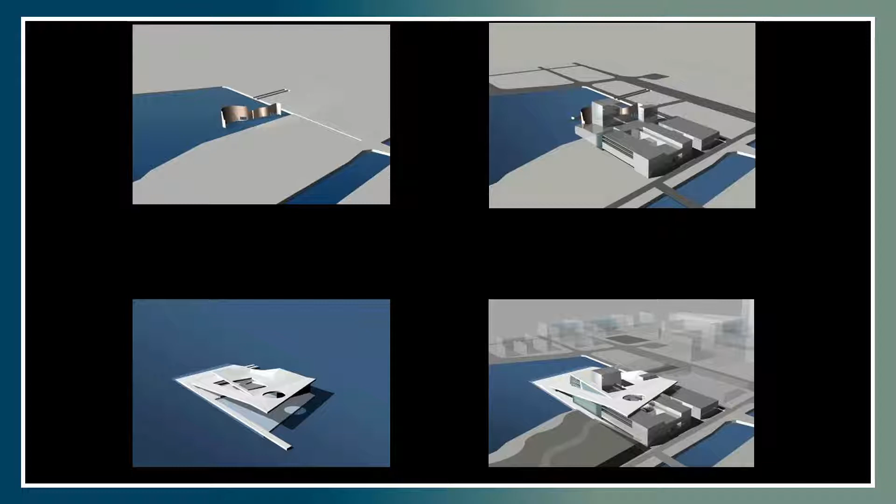If you look at these four diagrams describing the four main elements of the Opera House, or three main elements that then become the Opera House, you will see that at the upper left picture, there is a curved wall. And this curved wall is sitting exactly along the coastline between land and water.

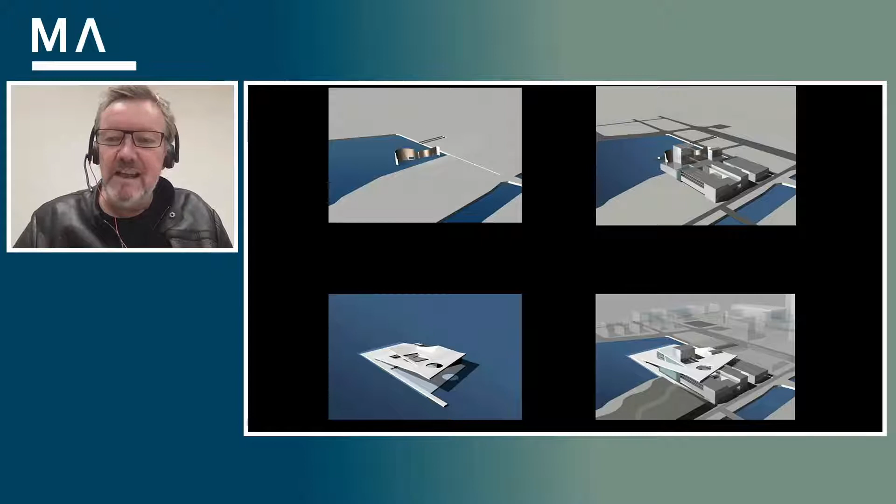And that is also the division between Oslo and the world. And this wall represents the definition of a threshold between the public and the performers in this threshold situation.

So you could say the performers are living in Oslo and working in Oslo. So they walk to the right of this curtain to work, to perform for people who are coming from outside and meeting this wall before they go into the performance. So the factory that you see to the right, upper right, is in fact a workspace inside the opera where people go to work from Oslo every day. And that is located on the land side of Oslo.

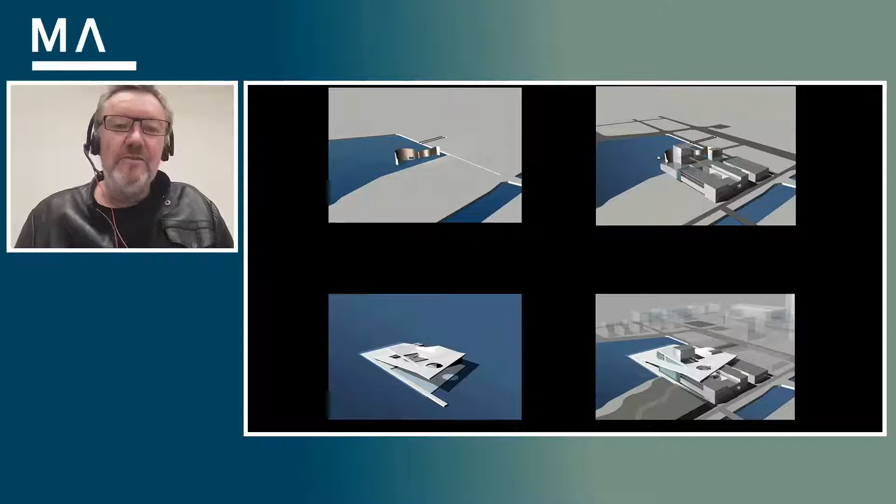But to the left of that, you have the public areas, the lobbies, and they are over the water. So in that particular location, you have a transition from over the water, through the wall, and onto the land side of Oslo. And that's how the sequence of thresholds were established.

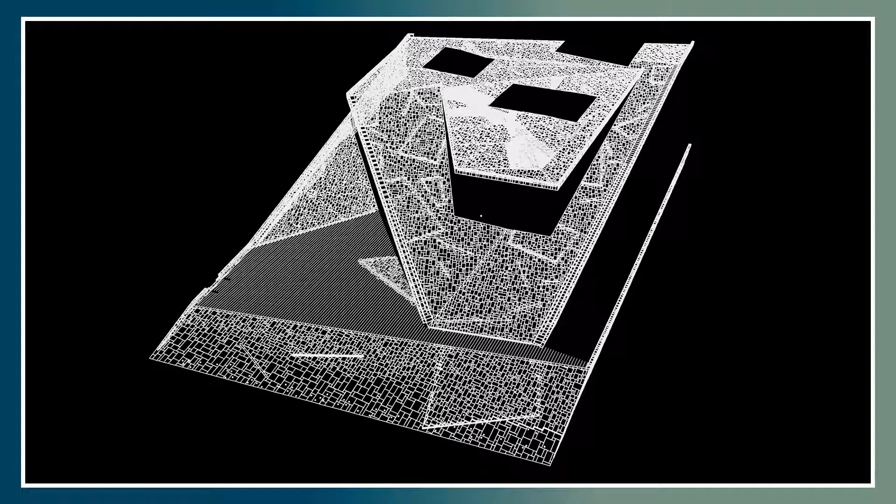And then, of course, we covered the whole thing with a carpet, a roof. And that gave us the possibility of interacting with the larger public with another type of threshold that physically was represented by the building.

A sloping roof that was climbing out of the fjord, out of the water, giving us the possibility to have an intersection between the horizontal waterline and the slow climb up this roof towards the top of the building on top of the opera.

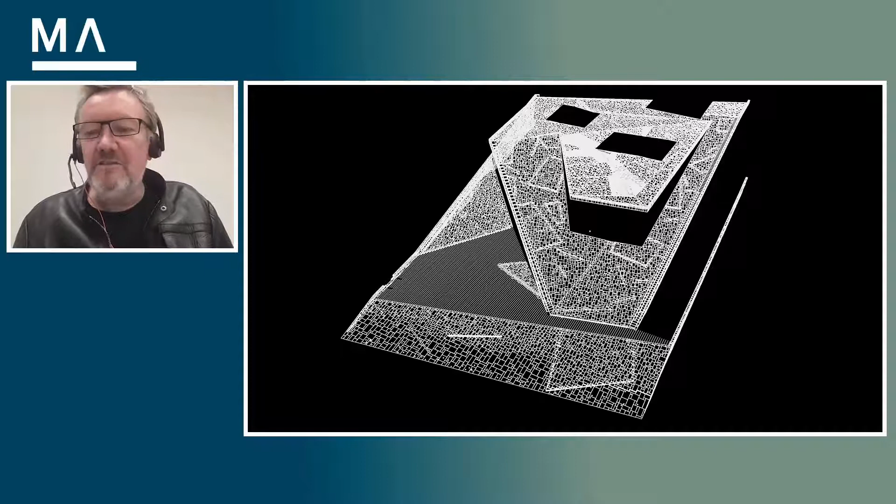That has given us the understanding that architecture might be seen as the art of prepositions. Inside, outside, over, under, between, in front of, behind are all locations of the body. Every threshold you move through is measured against the location of your body in relationship to something else. This roof symbolizes a way of looking at something you can walk on instead of something you walk into. All of a sudden, we had a preposition related to opera houses which said you can walk on the opera, not only in the opera.

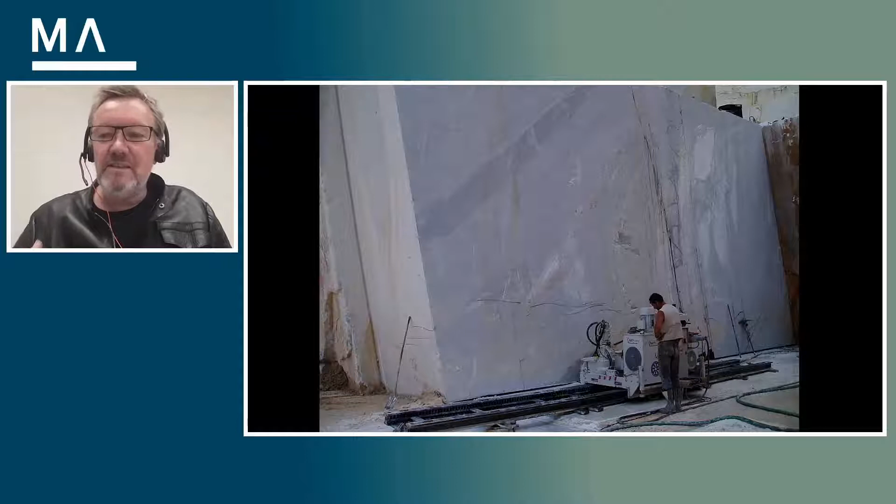So this roof then became an instrument for us to negotiate between the sky and the waterline itself. To find this solution, we had to dive deep into the mountains of Carrara in Italy. We had to find a quarry that would actually represent this whiteness and start treating this surface as a negotiator, as a Sunday shirt, but at the same time as something that connected the water with the sky.

We had to start testing the surfaces of this marble and move away from the perception of marble being something polished, like a bathroom situation. So the bush hammering surfaces of marble turned out to be wonderful when it comes to catching light, and all of a sudden they became a threshold between light and shadow.

We tested these things in one-to-one elements, large scale, with Campolonghi in Italy, and you will even see that these stones you see here are made out of one piece. There is no joint between the lower portion of the upstep and the upper portion of the upstep of this stone. It is one compact element of stone. That means there is no transition between horizontal and vertical when it comes to the solidity and massivity of the material itself. It's all made out of one element.

So the opera per se actually started moving us in a direction of understanding what we wanted to achieve when it comes to thresholding from inside to outside, from above to below, not only through human movement, but also through the movement of regular understanding of accessibility in a city.

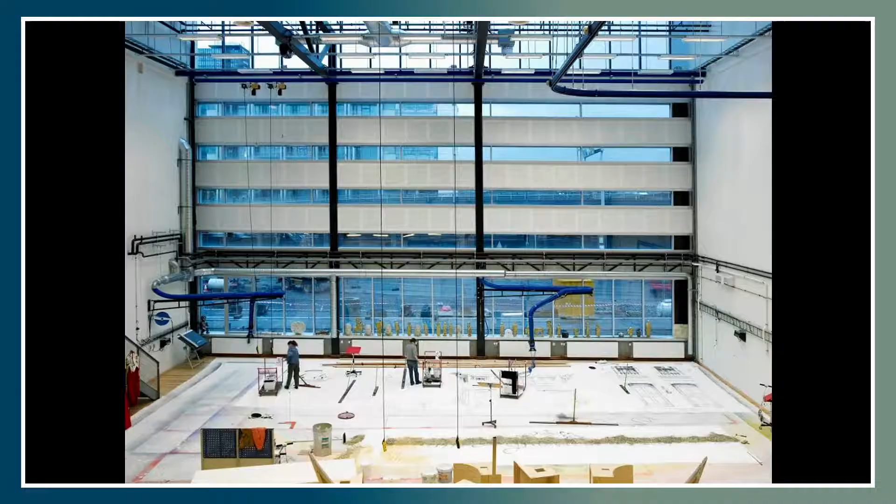That, of course, also counts for the back of house functions and the workshops. Like I said at the beginning, the factory located in Oslo provides a normal everyday situation for all the 800 people working in the opera house, and to provide a nice workspace for them that are actually creating the stage sets is another threshold, not unsimilar to the kind of setup and split of day that we have in our own office when we do architecture.

So to summarize, these kinds of things are things that you think of, and we've been writing about these things also during the competition.

These were themes we were thinking of when the building becomes the translator of all these things you're thinking. The question is, of course, do you actually connect the building with these things when you're there, or do you not? We don't really care. You might as well just sit on the roof and remember you forgot to buy milk for your home, and that's the only thought you had. So you don't have to deep dive into associative thinking in order to transfer yourself into a borderline situation.

Another project, published quite a bit lately but much smaller and of a different kind, is a small restaurant called Under. We were given the task by two brothers on the southwest coast of Norway to design an underwater restaurant. You can imagine at the beginning of such a job the sort of Caribbean feeling you might want—clear glass everywhere, sitting in a bubble underwater. But that wasn't part of our interest. We were not interested in that kind of transition from above to below; we wanted a much harder, more direct relationship between an object and the water.

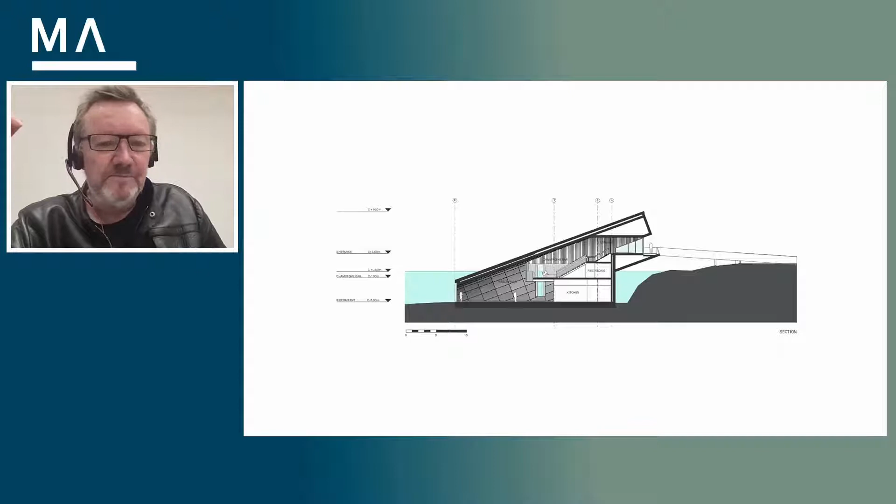The section of the building is simple. You don't really see everything above water and how it's actually constructed, but it was precast on a floating deck, then transported floating to the site, lifted off the deck, carefully sunk into the water, and filled with water so it would sink all the way down to the foundation points, where it would be fixed. Then, after pumping the water out, you had underwater space.

When you walk over this tiny bridge to enter the building, it's almost like the building has already left land and is more like a vessel than a building. But once you come inside, it's clearly a building—you meet a normal bench. It's not marine; it's an interior space clad with wood like any other building.

As the interior space opens up, you understand there's something different awaiting you at the bottom. The light coming through the big window at the end, six meters underwater, becomes your great attractor. On the way down, you can measure how deep you are by another vertical window showing the borderline between air and water in the middle. So you have a reference system as you move further down toward the bottom of the restaurant, where you sit and are served.

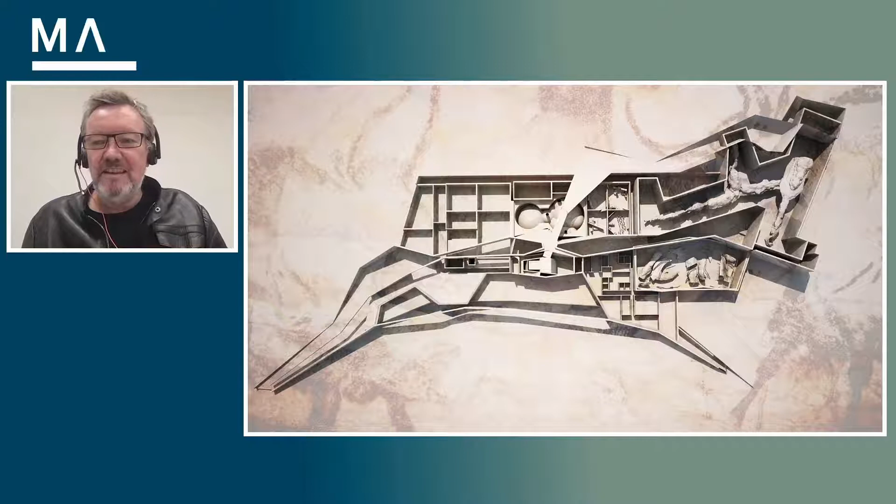You will see very clearly here that already in shape and form, the underground elements of this building largely overcome whatever you see above. The building is much, much bigger than what you experience, and at the same time it lies there like one of these deer jumping over a certain terrain - you don't see it, you don't notice, but it's there.

Now, I'm going to end - I'm not sure how long I've been talking - but the last project I'm going to show is quite different again, and to me extremely important because it's influencing so many people in their daily experience of how a city can be perceived. It is Times Square in New York, stretching from 42nd Street to 47th Street, turned into a pedestrian area.

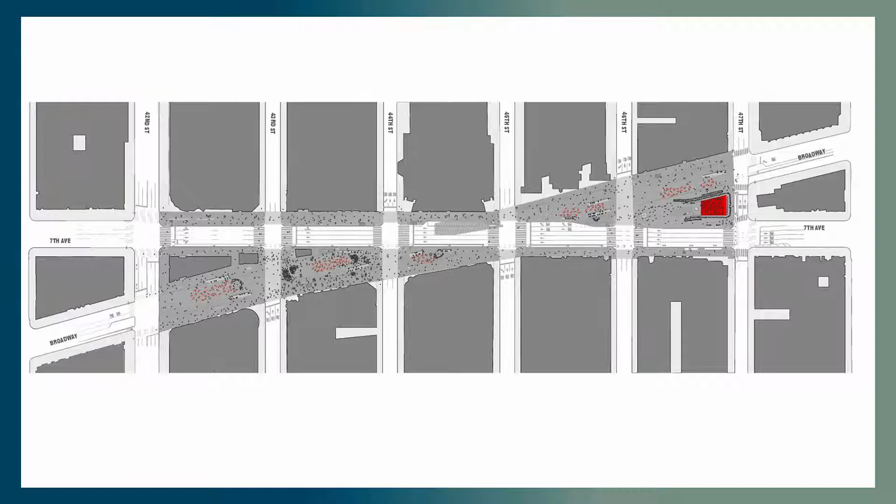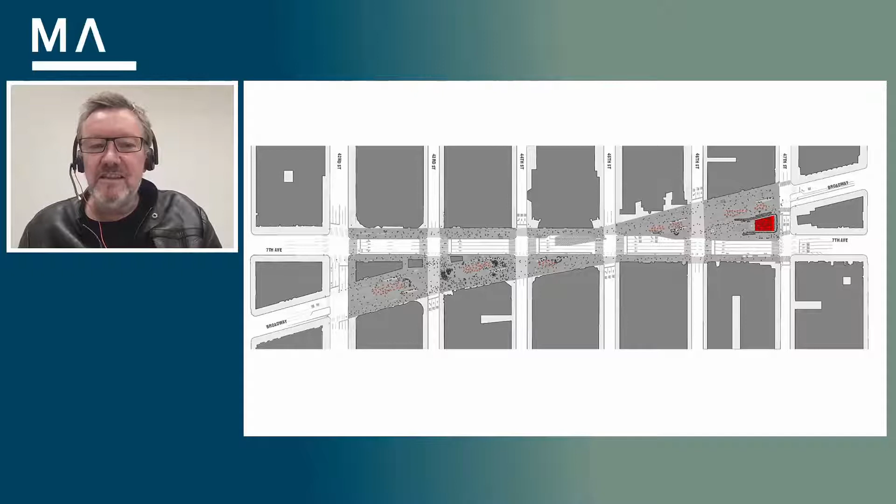The grid system of New York is of specific interest, but this diagonal stretch and the cross has a very particular meaning in the transition from a regular grid system to a diagonal in New York. This diagonal, and the way it crosses through New York - Broadway - makes you wonder why they needed this diagonal. It is a willing diagonal, and I believe all borderlines need a reference system. If you don't have a reference to the grid system, you will only experience the grid system as an ignorant. But once you introduce the diagonal - which here, if you look at this as a possible section, is the Opera House.

And all of a sudden, it's cutting through things in a totally different manner, this time in plan. The task was to transform a place which had been preoccupied by cars for so long that people had forgotten the proportions of this space.

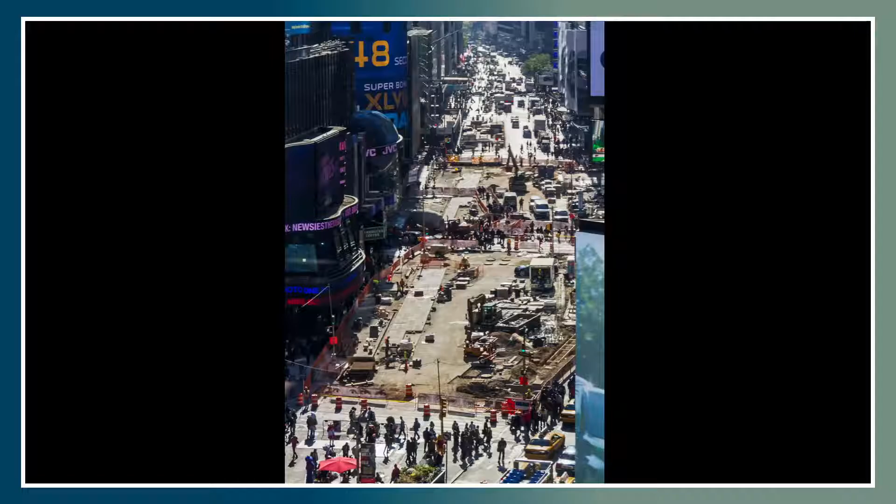They had forgotten about the diagonal. The place was not used by New Yorkers, it was used by tourists. At the same time, it became the transition zone for new infrastructure in New York—everything underground you don't see, providing new electricity lines, computer cabling, connection lines, water, drainage. The whole infrastructure is below this new plaza. So it's also the borderline between the services of a city that you don't see and the service of a city that you actually walk on.

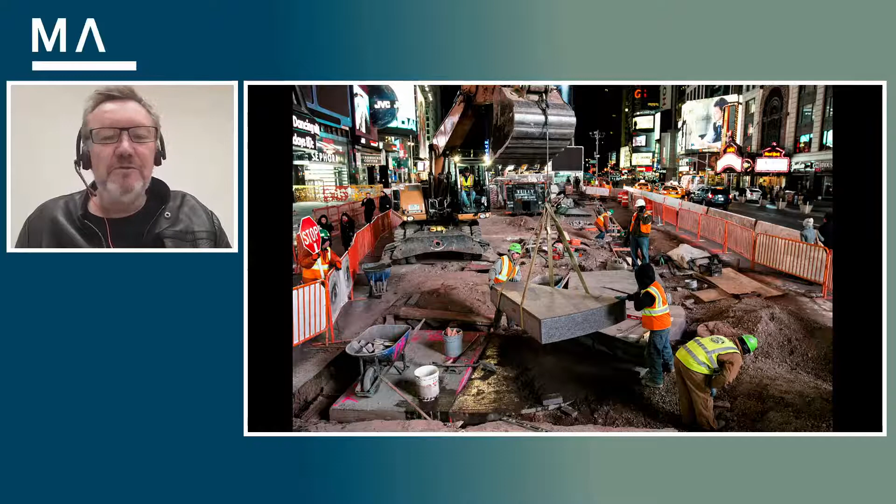At the same time, building and constructing this was strange because it had to be shut off. The idea of shutting off this street and hoping that the traffic would still go okay in New York was a big assumption, because nobody did any type of research before we actually turned this into a pedestrian area and closed it down.

So the cars just had to find their own way. There were no changes made to the city grid, no projections of how the cars should move in the future. That Times Square stretch from 42nd to 47th Street was just closed down. And the cars, of course, found a way, because cars react like water—they find a way if they can drive and roll the wheels over it.

So this new floor that we then established on Times Square is covering up all of this superstructure and infrastructure that is following the city grid of New York along a diagonal. And even in the layout of the stone, you will see that the transition between the two grid systems exists.

So even in a micro perspective, this way of moving from one position to another, in an oblique manner, is present. At the same time, the floor here had to connect to hundreds of different floor heights at street level, from shops and restaurants and everything connected. So it's become also the great connector.